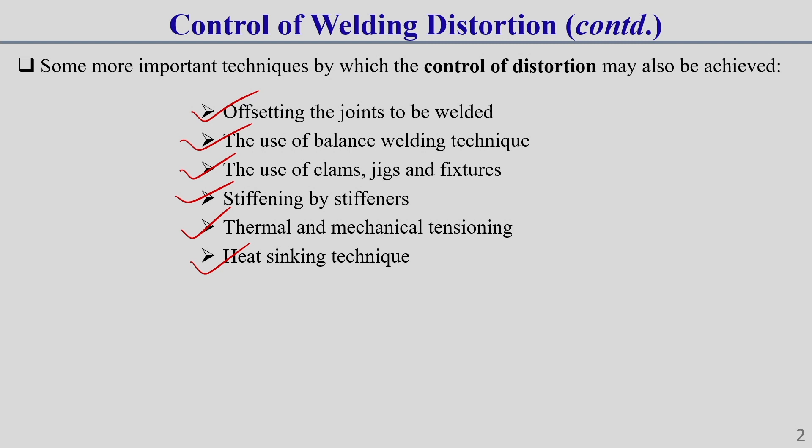Then some other techniques like thermal and mechanical tensioning, and another technique is heat sinking techniques. Apart from these things, I will discuss some other techniques by which to minimize or eliminate the welding induced distortion. So, these are the different aspects which I will discuss in detail in today's lecture. So, first of all I will discuss about offsetting the joint to be welded. By offsetting the joint to be welded, we can control the welding induced distortion significantly.

Like once you do the welding, like this is a T joint. For T joint we know it is required to put some fillet weld here. So, what happens, once this fillet weld zone shrinks, then due to shrinkage its shape becomes like this. That is why here I have written angular distortion after weld. That means some angular shape is developed in the welded structure.

So, we know after welding how the shape is coming, because as here you can see, the top side shrinkage force is more. Due to this top side shrinkage force with respect to neutral axis, here the welding distortion occurs which looks like angle in nature. Here you can see. So, we know that once we do the welding in a T joint, then the shape will come like this.

So, beforehand if we preset the member with some presetting angle, like I am showing in second figure, here you can see. So, if we just place the plate in opposite direction, like here you see, after welding it is going upward direction. So, before welding if we just put it in downward direction like this, and after that if we just do the welding here and here, then due to the shrinkage force this plate will return back to its original position, or you can say its horizontal position.

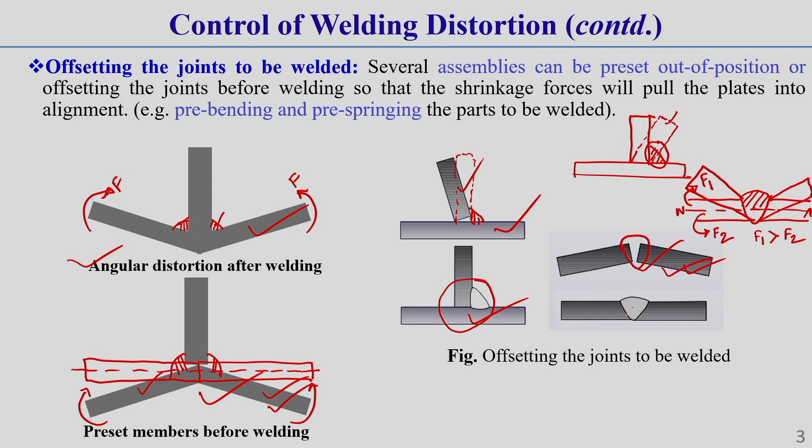So, if we preset this in the downward direction, or offset the plate in this way, which I am showing for the butt welded joint, then once we do the welding, due to the top shrinkage force the plate will be aligned to the appropriate position. It will give us the shape we want, that means a horizontal shape. So, this is one technique by which we can control welding distortion.

I will discuss another technique, called balanced welding technique, or by using different welding sequences we can also control the distortion significantly. So, some of the most widely applicable welding sequences I am going to discuss, by which we can control welding distortion significantly. One of the techniques is called the back step welding sequence technique.

What does it mean? In back step welding, the welding generally progresses in this direction. This is the welding direction, gradually progressing this way, but we start the welding not at the end but at some position. The first weld pass will be in this direction, the second starts from another location just after that, in the opposite direction. This welding sequence technique is called back step welding.

This is third, this is fourth. Actually welding progresses in the rightward direction, but the welding sequence is done in the left side direction. This is first pass, second pass, third pass, fourth pass, meaning fourth sequence. So, first you do this portion of welding in this direction, then instead of starting from this position, we start from the second position, then here, then here.

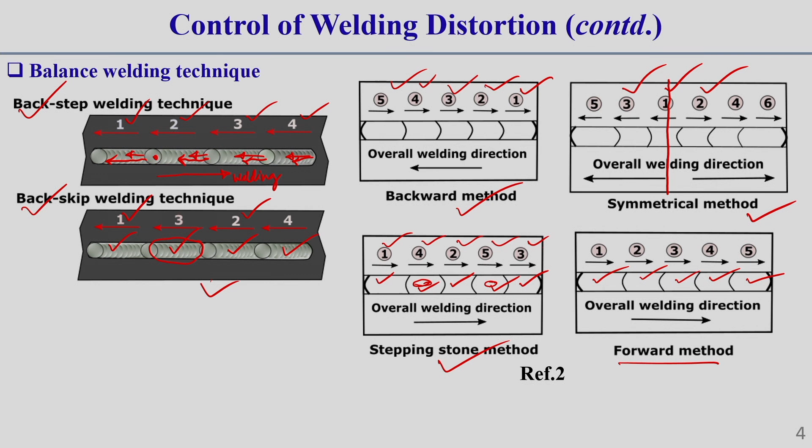So, these welding sequence methods are also known as balanced types of welding sequence, because one sequence generally balances the other sequence significantly, by which we control both welding distortion as well as residual stress significantly.

Now, here I am going to discuss the use of clamps, jigs and fixtures. By using clamps, jigs and fixtures, we can control the welding distortion. But one thing you should keep in mind: once we provide a jig, fixture or clamping type of device to hold the workpiece together, we prevent the free movement of the expansion and contraction phenomena. Once we restrict expansion and contraction, there is a chance of developing internal residual stress significantly. Jigs, fixtures and clamps are devices generally used to hold the workpiece in the required position.

So, here generally we restrict the movement of the workpiece due to this expansion and contraction phenomena during the welding process. That is why we can control the distortion significantly, but due to the restriction of the movement of the workpiece, internally some locked-in stress is developed.

So by using these types of holding devices, the residual stress increases significantly, but we can control the distortion significantly. By using clamps, jigs and fixtures we can control the distortion, but the residual stress is increased. The main advantage of using a jig, fixture or clamp is that the element in a fabrication can be precisely located in the position to be welded, but its main disadvantage is that a high level of residual stress is developed in the welded structure.

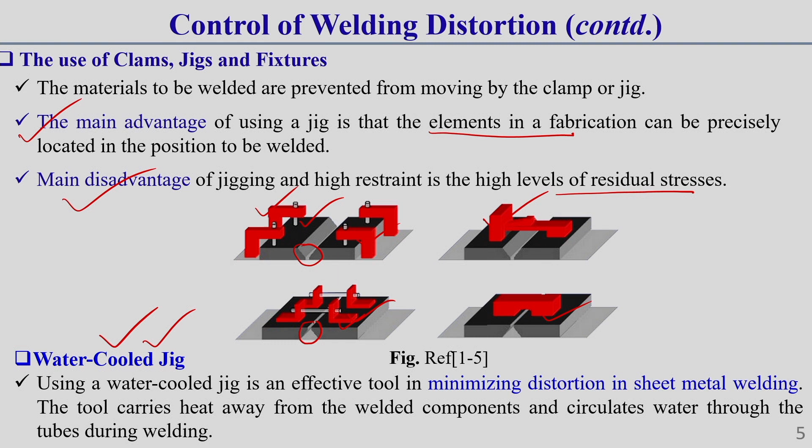Now, we will discuss tack welding. It is an ideal welding technique for setting and maintaining the joint gap, but can also be used to resist transverse shrinkage. First of all, we should know what a tack weld is. Let us say we are going to join two workpieces together. This is one plate and this is another plate. A tack weld is generally used to align the workpieces together and to maintain the root gap. The root gap means the gap between the two workpieces at the root side. You should keep this in mind.

Once this gap is maintained properly, your weld bead quality will be proper and your weld joint quality will also be proper. To maintain the root gap and to fill the weld material properly in the joint region, this type of opening is required between the two workpieces. So to maintain this root gap, we put some small spot-type welds along the entire length of the welding specimen. Like this is one tack, this is another tack, and another. So we put different tacks like this, as you can see.

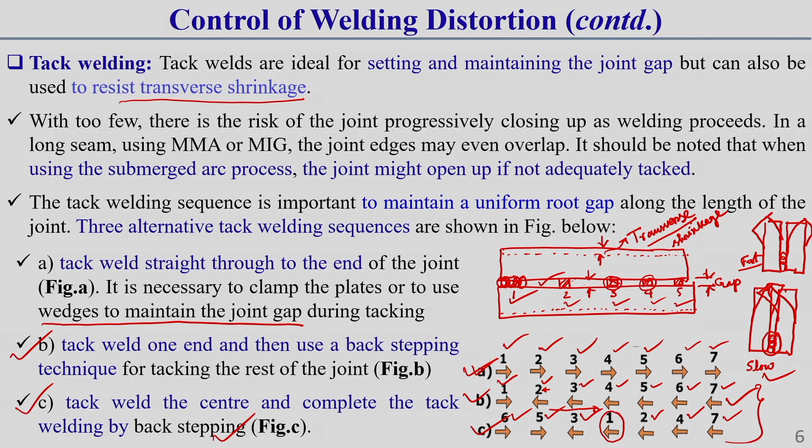Now, we can control the welding distortion by some other means also. Back to back assembly also can control the welding distortion significantly. Here, by tack weld or clamping, in case of two identical components, we generally tack weld them back to back. Here you can see in figure A I am showing.

So, after that we have to do the welding, that means we have to put the stiffener like this, and do the welding on both sides, here you see. After that we have to eliminate this tack from here. So, first of all, before welding this stiffener, these are all called stiffeners. Generally this stiffener is put over the plate. Stiffener types of welding we generally do in case of plate to stiffen the plate.

Okay. So, once we do the welding to put this stiffener over the plate, there is a chance of significant welding distortion. To prevent this, before putting this stiffener, first of all we have to put these two identical components of the workpiece together by using some tacking. Here you see these are all tack types of welding. Okay. After that we have to put this stiffener by welding over the plate.

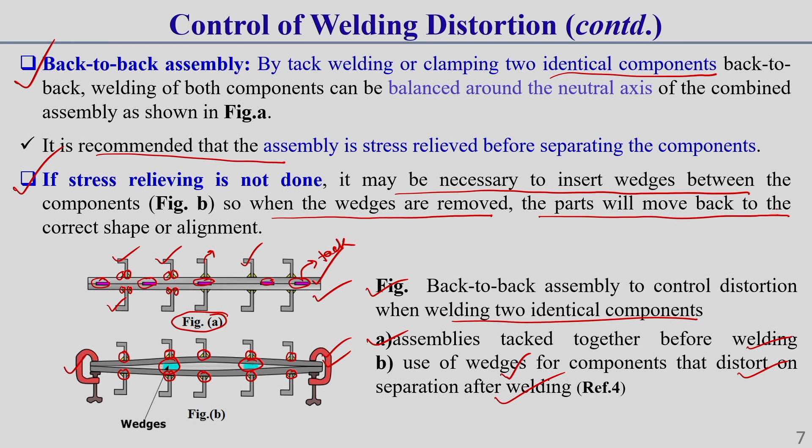That means after welding, once we release this wedge and remove this clamp, whatever the distortion and stress effect developed inside this welded structure will release, and the distortion control will take place significantly. That is also written here. It may be necessary to insert wedges between the components. So, when the wedges are removed, the part will move back to correct shape or alignment.

Now, this is another technique by which generally we can control the distortion significantly. This type of technique is especially used for thin sheet butt welded plate. This technique is called stiffening by longitudinal types of stiffener. What does it mean? In case of thin sheet butt welding, there is a chance of longitudinal shrinkage due to the solidification effect of the weld bead. Longitudinal shrinkage means shortening of the length of the weld specimen.

So, due to this longitudinal shrinkage force, if the plate is thin in nature, then there is a chance of bowing effect. Bowing effect means due to this shrinkage force there is a chance of deformation of the plate like a bow. A bow type of shape can develop due to this longitudinal shrinkage. Now, to prevent this longitudinal shrinkage effect or to prevent this bowing, what is required?

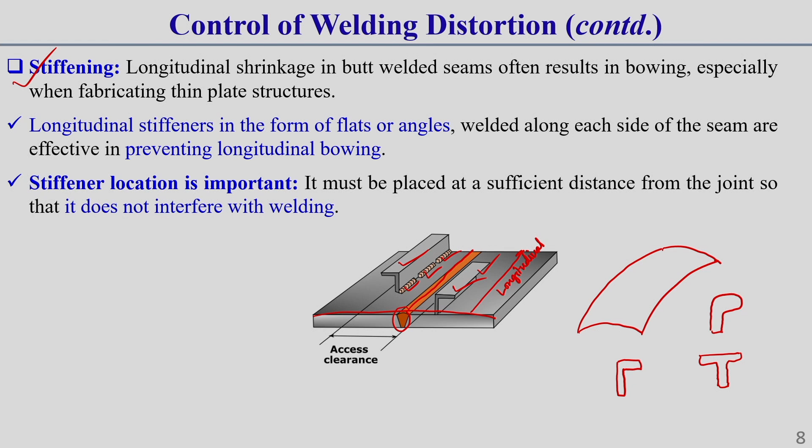Okay. But one thing you should keep in mind: we should insert this stiffener in such a location that it does not interfere with welding. That means we should put this stiffener at a particular distance from the center of the weld line, so that it does not interfere or affect the welding operation. This you should keep in mind.

Now, some other techniques are thermal tensioning and mechanical tensioning. These are very interesting and popular techniques nowadays to prevent welding distortion. By this we can control the welding distortion and welding residual stress significantly. This tensioning process involves generating tensile stress at the weld zone. So, during welding, either by mechanical tensioning or by imposing a preset temperature gradient in the weld zone, we can control the welding residual stress and welding distortion significantly.

Especially in mechanical tensioning, the panel is first stretched mechanically. Once we stretch this panel mechanically, during the welding operation there will be some tensile stress in the welding zone itself. So, when the stretching load is released after welding, the plate shrinks and there is a reduction in the amount of residual stress in the plate, as well as a reduction in distortion.

So, thermal tensioning is also a process which generally involves generating tensile stress at the weld zone before and during welding by imposing a preset temperature gradient. In thermal tensioning, a combination of heating and cooling elements is generally used to prevent, or you can say reduce, the weld-induced residual stress as well as distortion.

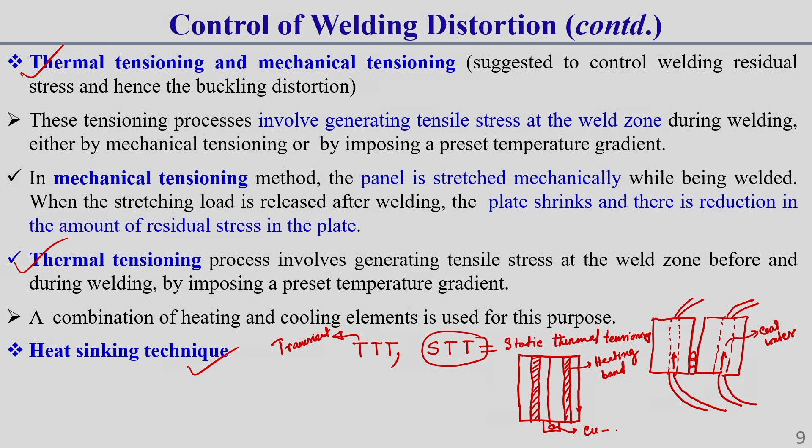In this copper backing bar there is a drilled water channel through which water circulates. So, below the weld line we use this copper backing bar for cooling purposes. These are all stationary; they are preset over the weld plate. So, during and after welding, we heat.

So, by this heating band here, generally we use a range of heating. That means this range of heating can vary from 100 degree centigrade, then 200 degree centigrade, then 300 degree. So, different temperature ranges we have to heat in this region, and below this weld there is a copper backing bar through which generally water is circulating. So, one is the cooling effect we are providing, as well as at the side we are using some heating effect.

Due to this cooling and heating effect during a welding operation there occurs some thermal tensioning, because there occurs a thermal gradient near the weld zone. So, due to this thermal gradient in the weld zone we generally get some tensioning type of effect. Due to this tensioning effect, we can control the welding distortion and residual stress significantly. This is called static thermal tensioning.

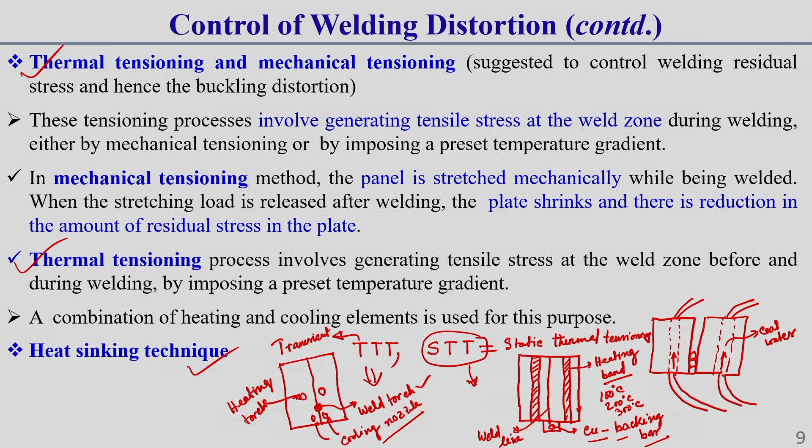So, you see ahead of the weld torch, or welding position, there is a heating effect. Just behind this heating torch there is a cooling nozzle, that is, a cooling effect. By using these things we can create some tensioning effect in the weld zone. By applying this tensioning effect we can control the welding distortion and residual stress significantly. These are some very important techniques by which we can control the welding distortion significantly.

As I have already told you, to stiffen the bare plate we generally put some stiffeners over the plate. You see, this is one stiffener, this is another stiffener, this is another stiffener. Now, once we do the welding continuously along the stiffener, left side and right side, without stopping anywhere, then due to this continuous fillet weld the welding deformation that takes place is significantly very high. Instead of a continuous weld, we can just do some intermittent fillet weld.

Intermittent fillet weld, what does it mean? Here one thing you should keep in mind. So, let this be a plate, over which we are putting this stiffener. Let this be the cross sectional view of this plate and stiffener. So, here we are doing a fillet weld. You are well familiar with what is fillet weld and what is butt weld, so I am not going into details here.

So, intermittent weld means instead of doing continuous welding, on some portion of the plate we do welding, after that we put some gap. That means here we are breaking the continuous welding process, and we are doing the welding after providing gap after gap. This type of welding is generally called intermittent welding.

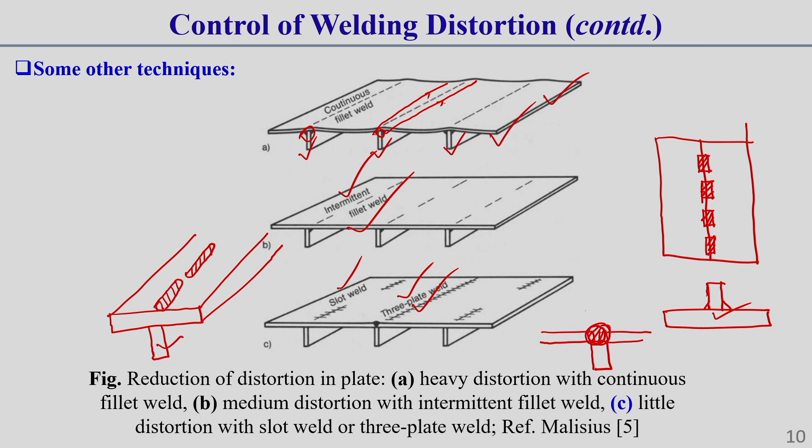Apart from slot welding, there is another way we can put the stiffener: instead of a single plate, here we can use 2 plates. Over these 2 plates we can put the stiffener like that, and after that we can do the welding. That is called 3-plate weld. If we do the 3-plate weld like this, that means 3 separate plates together and weld in that joining region, by this also we can significantly reduce the welding distortion. This you should keep in mind.

Now, in a welded structure, some welding distortion has already occurred. How we can eliminate or minimize this deformed shape is called correction of distorted weldment. There are different means of correcting the distortion. We can correct weld-induced distortion by using some mechanical means or some thermal method. In mechanical means, we can press the distorted portion, or we can do some peening type of operation, generally by hammering the backside.

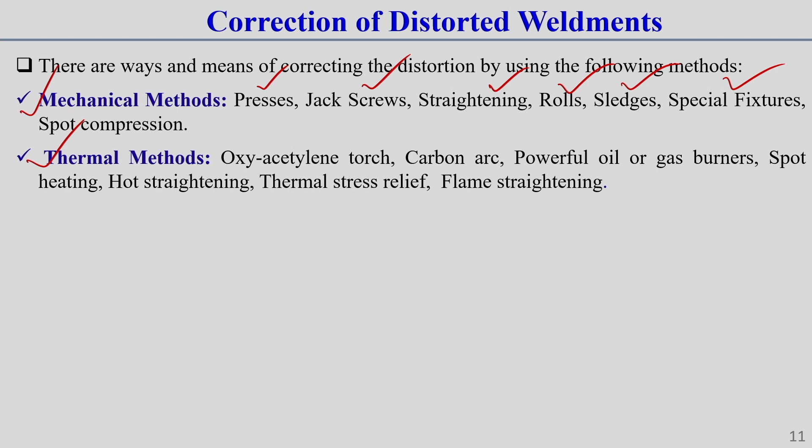Then we can reduce that deformed shape. By applying a jack screw, we can press the distorted portion and minimize the distortion there. We can use some straightening techniques, we can use a roller, we can use sledge types of instruments to control the distortion. We can use special types of fixtures to minimize or eliminate the distortion. We can also provide some spot compression, meaning where there is distortion we apply spot compression to minimize it.

We can also correct the distortion by some thermal method. Thermal method means if we heat the distorted portion, there will occur some expansion and contraction phenomena, by which we can control the deformation significantly. That is why the thermal method is also popularly used. There can be an oxyacetylene torch, carbon arc, powerful oil or gas burners, spot heating, hot straightening techniques, thermal stress relief techniques, or flame straightening techniques. These are the different techniques generally used to correct the distorted weldment. This you should keep in mind.

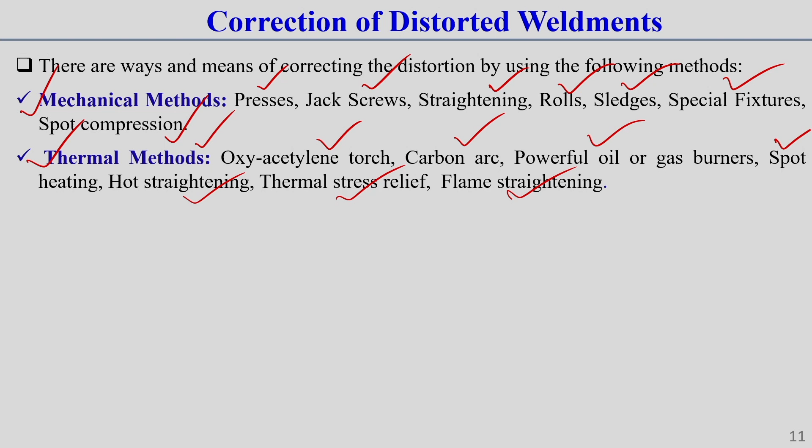Thermal stress relief here means controlled heating of the distorted plate to some elevated temperature and controlled cooling. Once we do the controlled cooling, stress relief occurs and simultaneously the distortion is minimized. So, different types of techniques we can use to correct this distorted weldment.